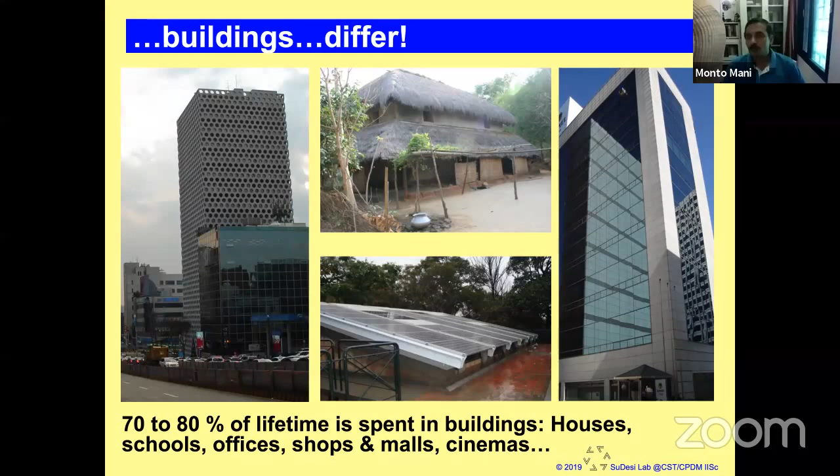Today there is a complete new concept of wellness, where people are looking at holistic living, mental health, physical health. So the metrics of satisfaction with life was: am I happy? Do I have time with my family, time with my friends? Those sort of things, rather than what is my income level, my take home salary, do I have insurance, what is the GDP. Those were the initial performances of prosperity. Today they are looking at a different measure for it.

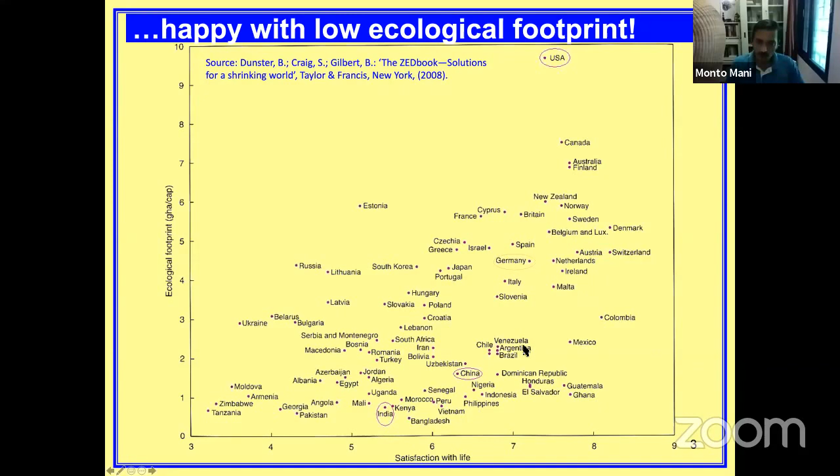And with this whole COVID situation where we were forced to stay at home, forced to put up with a lot of activities happening parallelly, managing school, managing office, managing the home front, it has also brought forth the fact that we need very little. Earlier we were wanting to travel every time, didn't have time to go to office, the traffic. What this corona has also taught us is how much little we actually need to survive.

So if we relook at reopening the economy and going forward, it has already taught us a few lessons in terms of, do I continue the way I was continuing before, or can there be some improvements I can take from? Definitely it has caused a lot of grievances, a lot of deaths, no doubt about it. But at the other end, if you look at what opportunity it has given us, it has given us an opportunity to stop and think as to whether I should continue the way I was doing before the whole COVID situation started.

And this is happening across the world. Construction industry is looking at green approaches now. Industries are looking at greener manufacturing options, looking at net zero energy, things like that, which didn't happen before.

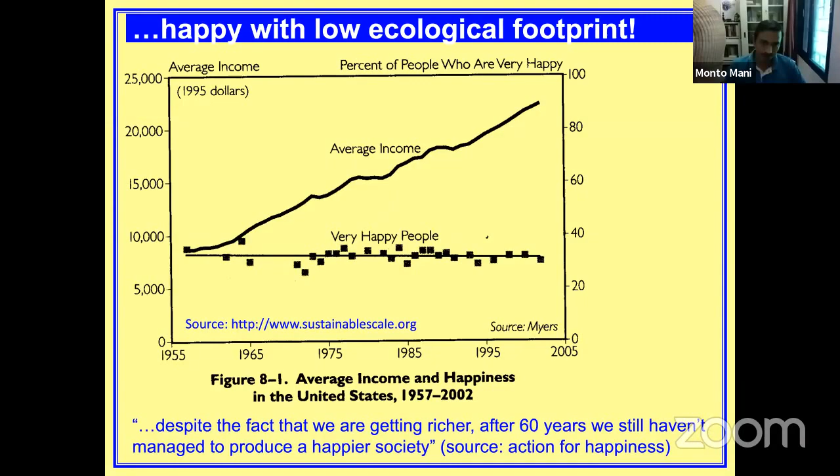Not requiring electricity at all and generating as much electricity as you consume are both not the same. I'm not saying that the people on the left don't use energy - they use firewood. If you compare the health levels of those people versus people in the city, people in villages are always healthier. There is always this concept of development, impoverishment, deprivement, drudgery which we associate with the village. Unfortunately, today that is taking a very different perspective.

I'll give you an example. I go to a village market every week, until this corona issue started, where I used to find ladies lift heavy bags of vegetables. If you see the way they lift the vegetables, it looks like they're doing a gym workout. Now the problem is that any engineer who sees it will say, oh, that is drudgery, ladies are not supposed to lift that much.

If you go to a village farm, you will see villagers doing hard work through the day, and we say, oh, that is drudgery, we need to give engineering solutions to that. We provide engineering solutions, and then people take to a very convenient, comfortable life, because of which obesity starts to set in.

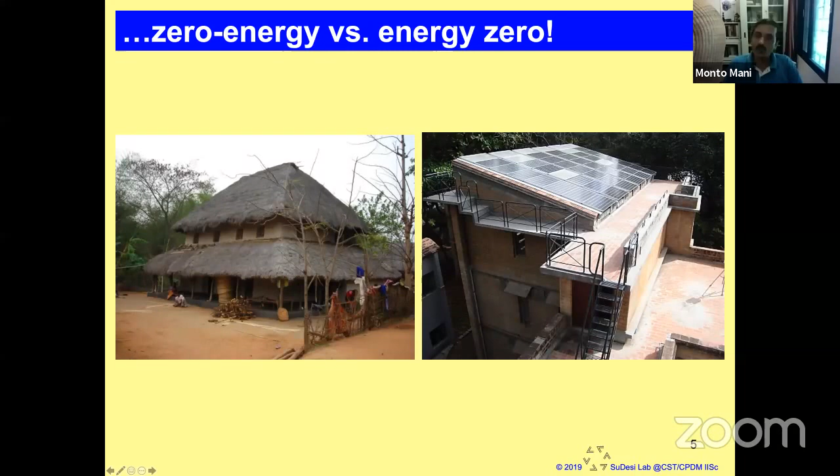Operational energy is the energy required to keep the building comfortable. For example, if you have a house which is very poorly lit, you need electricity to drive some bulbs because you need to work in that room.

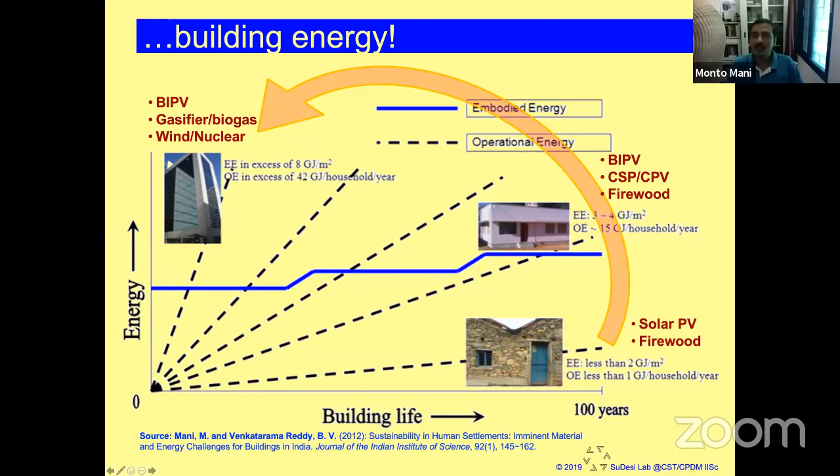So you will see the nature of energy densities that are required. And for example, large power plants covering desert areas. Today, large power plants, large photovoltaic systems are covering agricultural lands to provide for city-based energy consumption. The challenge we have here now is that villages are also changing. At one side, it is good, where we say that modernization should happen. They also have a right to access modern life.

On the flip side, we are losing the skills associated with these materials. We are losing the technical know-how with these materials. And I will also tell you why that is important. And what is happening is that their energy dependence also increases because the way the houses are changing, first the roof changes, then the wall changes, then the entire house changes. The houses become more uncomfortable, which means they need fans, they need air conditioners after that. An air conditioner then becomes a lifestyle requirement.

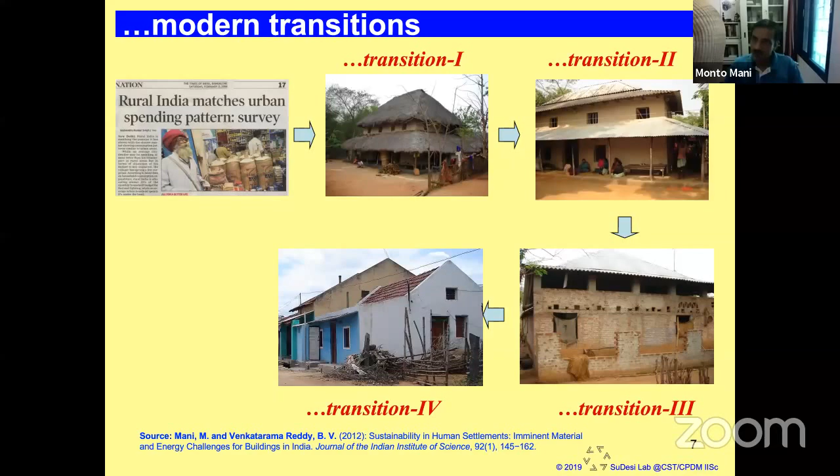Now, this transition is happening in China as well. Now, the world is worried about India and China, worried in both senses. One is an opportunity, the other is a threat. The opportunity is that 1.8 billion people, say about 0.6, 0.7 billion in India and 1 billion, 1.2 billion in China, are rural population. And if these rural populations are going to improve their lifestyle, adopt a modern life, it is very good for the economy. Economy will grow.

Right? The threat side is if they start adopting 40 times, 50 times the resources that they were originally consuming, do we have the capacity to provide for those resources? What about the emissions associated with those changes? We are already having threats of climate change. And if that is going to increase by 40 times, then how do we address this situation? So the challenge becomes how do we regulate their aspirations, provide for their aspirations, while trying to keep the resource dependence, the ecological footprint, and the emissions lower.

These are the estimates that we had made in 2012. And what we found is that if the houses were just changing material without the form changing, there is 6 tons of carbon dioxide emissions per house, right? And if you then project it further, we will find that this embodied energy alone can moderate about 10 to 15% of the 2030 projection for GHG emissions, right?

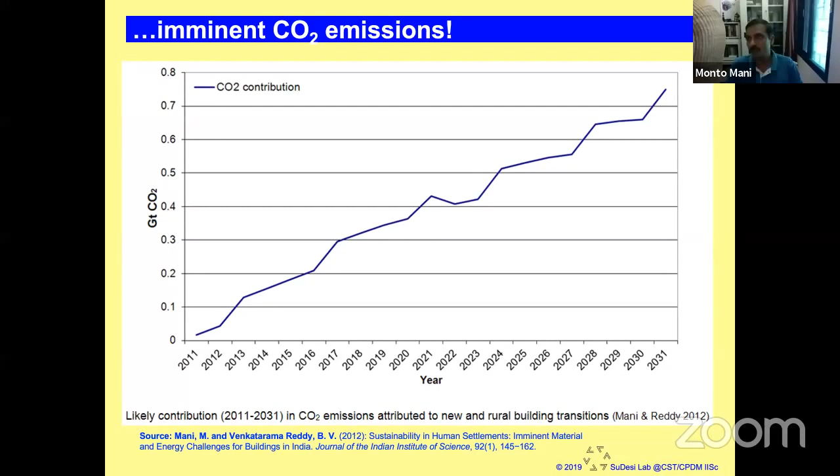And if you also look at the operational energy, I've looked at the very basic operational energy. These were based on our own studies in villages, matched with the government reports on purchasing power, appliances, appliance efficiencies, adoption of energy efficient measures, and all of that. What we find is that this projection is not yet accounting for embodied energy, the rebound effect.

What the rebound effect states is that when appliances become more and more efficient, they become more affordable and people start to own more of those appliances. So the net result is because of using energy efficient devices, our net energy consumption actually goes up. It doesn't go down. And that is a serious problem because even if you today go to Google and type rebound effect, you will find that places like Germany are having problems of 200%, 300% rebound effect, right?

And the thing is, take our own lifestyle. What I was consuming 10 years back, my own energy, and what I'm consuming now, I'm consuming more now than I was consuming 10 years back. The computer that I'm using is more efficient than the computer I was using 10 years back, right?

And this also is visible in villages, where at one time there was just one television to a village showing Doordarshan, and Doordarshan would operate from 7 in the morning till about 9 o'clock and about 7 in the evening to about 9 o'clock. And the village used to get together to see one movie or maybe a cricket match, discuss, so the social unity was much better. And with that, they would switch it off.

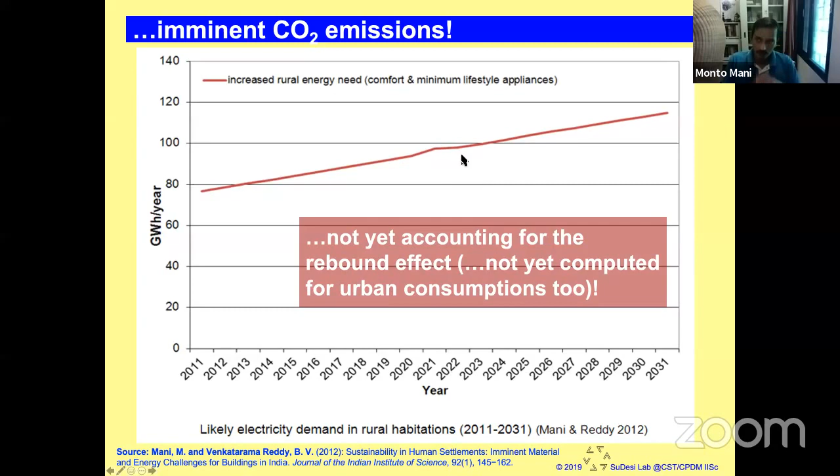This was a study that I was telling you about vernacular dwellings. Our students actually presented this last year at the conference in Heriot-Watt University in Dubai, where it was a conference on comfort at the extremes, looking at how climate change is going to impact dwellings. And what we did is that we took a few dwellings in rural Bangalore and studied if their temperatures and humidity conditions were going to change.

Say if they were moving from warm, humid as they are today to temperate zone, and what if they move towards hot, dry zone, right? And we looked at both traditional dwellings and conventional dwellings. Conventional dwellings are what you see in the city.

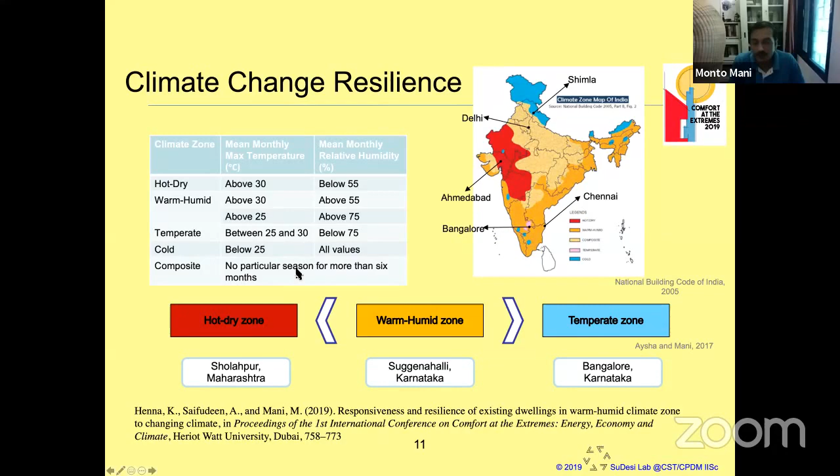And what we found is that as of now, conventional dwellings require fans because their natural ability to provide comfort is less, whereas vernacular dwellings more or less lie within the 80% band, right? Which means that the dependence on electricity, like fans and coolers, is much lower. Then if they get warmer, hot, dry, you see how badly the conventional dwellings are going to respond as against vernacular dwellings. And if it goes to temperate, you will see that the vernacular dwellings perform very well.

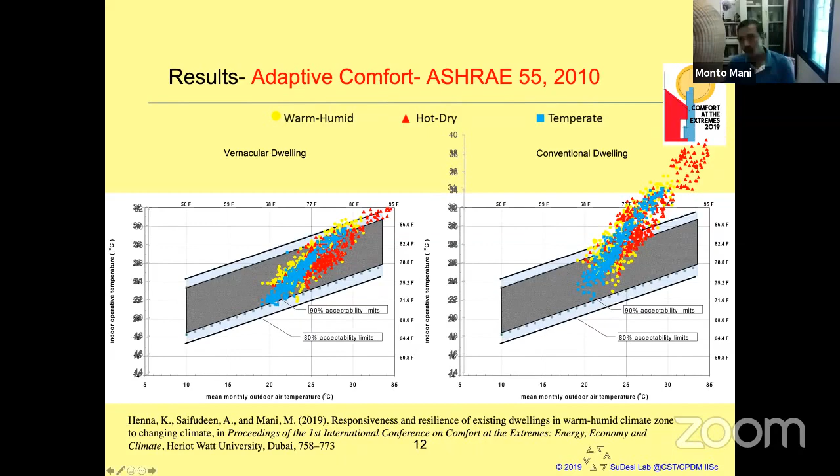Then coming to photovoltaics. See, everyone says photovoltaics is green. But if you look at the reports since last month, the government is now coming up with a contingency plan for what to do with discarded, waste photovoltaic panels. And we are talking of a few 100,000 tons of photovoltaic waste coming out every year, starting from 2030. Because though photovoltaic manufacturers claim a life of 20 to 25 years, they are decommissioned in 10 years, 12 years because they are economically unviable.

Degradation rates are much higher. And maintaining them becomes a problem. So what do we do with these panels, right? So that is a serious issue. And you can't take them to the dump site. You can't easily extract the silicon and recover resources, because those technologies are still very, very uneconomical at commercial scale, right?

Germany is doing some work. At IIT Bombay, there is a group doing some work. All over, there are some research activities happening in this area. But we have not thought about what happens to these panels at end of life, right? Even in the operation of these panels, it is very challenging.

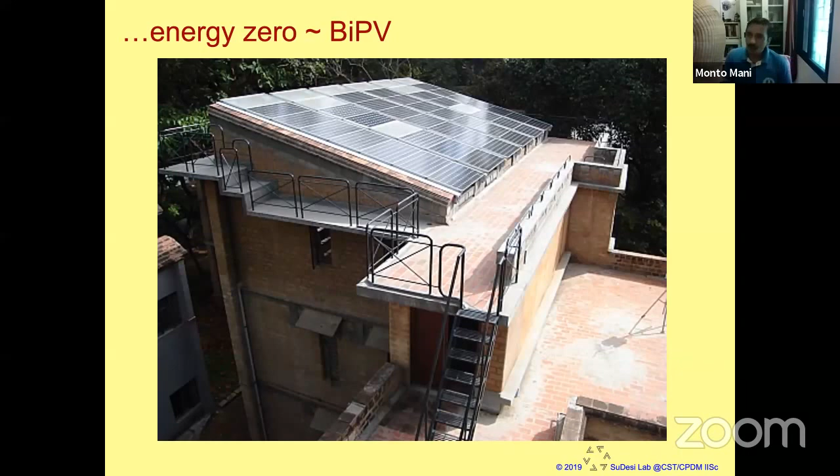So this was some work that we published way back in 2010, and it is actually the single most cited paper in the area of dust impact on photovoltaics, right? And in fact, the paper subsequently went into supporting a lot of projects across the world, including what we have in this Indo-US consortia here. And what we did here was to understand the various mechanisms that influence soiling. And soiling has a very detrimental effect on the performance of the PV panel.

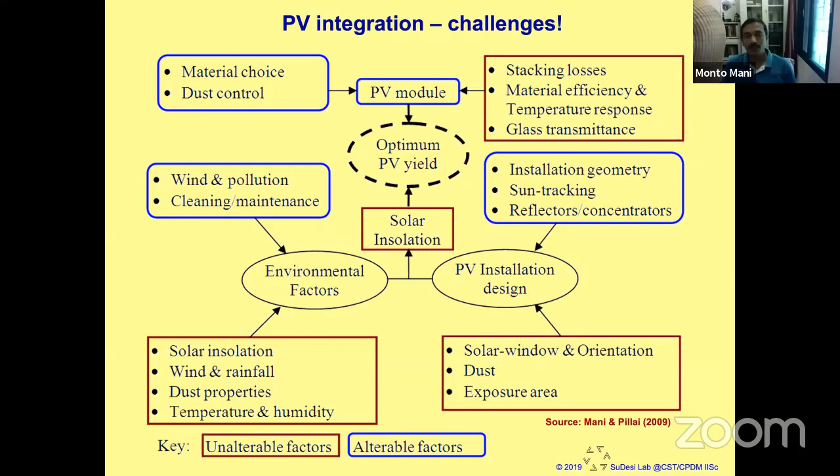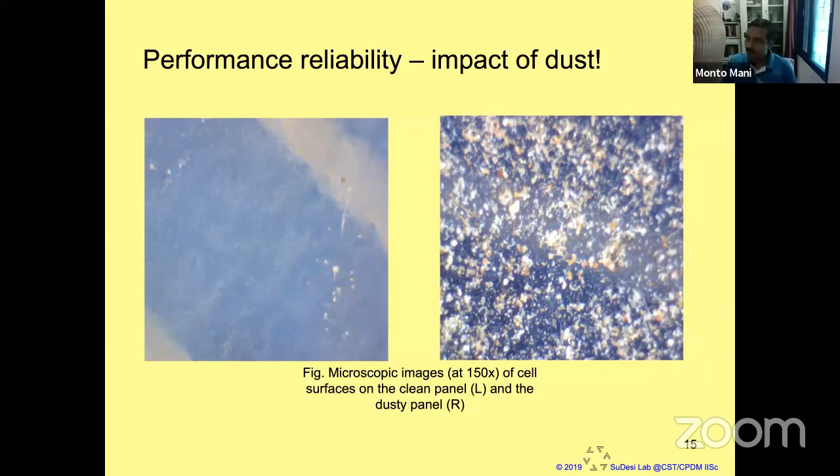And people are not aware that it takes about half a liter of clean water per meter square per day to keep the panels clean, right? So you can imagine for a megawatt scale level where there are a few tens of acres of land utilized, half a liter of clean water per meter square per day is a lot, because there is scarcity of drinking water, right?

And I know there is a power plant in Sri City which is buying mineral water to clean the panels, simply because the groundwater salinity is very high and that causes stains. We cannot use seawater to clean the panels. So what we did is that we tried to look at mechanisms to reduce the water requirement to clean these panels, and brought it down from 500 ml to 50 ml. And then we looked at other phenomena happening at the surface between the solar radiation and the panel when there's a dust layer in between.

And here we used simple brooms, palm leaf brooms, which are used in villages. And we found that palm leaf brooms are extremely effective in taking up dust without the need for water. And they are also very easy to maintain, because we put the edge of the palm leaf under the scanning electron microscope, and we found that the tips are like that of a shark's teeth. With every layer breaking off, there are more sharp edges coming out, which means that the brooms are able to retain their cleaning efficiency as you use them.

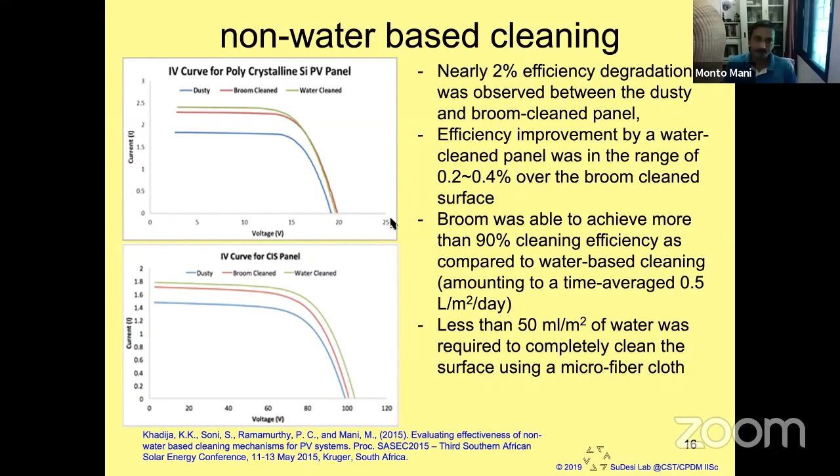I will also come to another aspect, smart buildings. There is a lot of work across the world saying smart buildings will reduce energy, will make places more comfortable and all that. Now corona has pulled the gas out of that belief. Today, the ASHRAE standards, the American Society for Refrigeration and Air Conditioning, are clearly stating we need to bring fresh air inside the buildings, even in an air-conditioned building, simply because air conditioners tend to recirculate air within the building, which is bad from a COVID point of view.

So the entire air conditioning code needs to change, right? People are now looking at opening windows, allowing fresh air inside, because air conditioners will spread the disease, right? People are looking at sitting more spaced apart, whereby the air conditioning load will be higher, because instead of a room occupying 20 people, there are only 5 people sitting in that room, right? So this whole concept of smartness has been punctured, right? And I will tell you another example.

This is some work that we started about 3 years back: where do we put energy sensors, or energy neutrality sensors? Now, what I mean by energy neutrality is, if you take a small sensor, say a motion sensor, which detects activity within a space and switches on a light, where does it make sense to put them, and where does it not make sense?

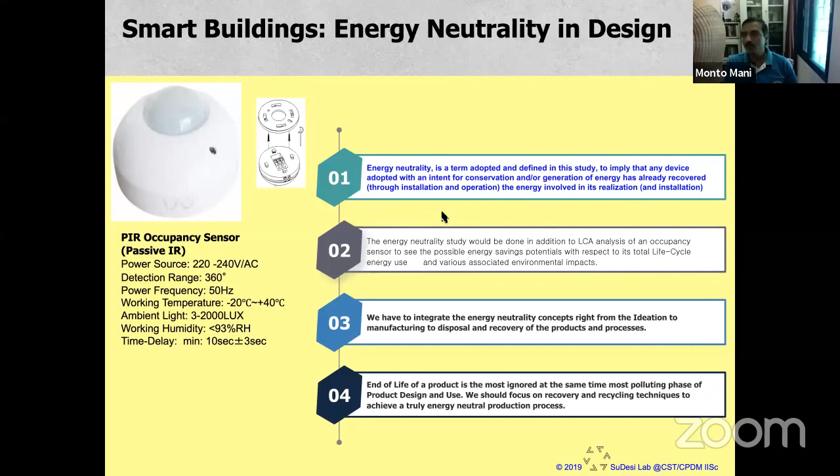So this is what I said. We looked at all the data very minutely and said what happens if a sensor is manufactured in Shanghai, brought and installed in a building in Bangalore. And we came up with this measure of gram per wattage ratio. The gram per wattage ratio is the grams of the sensor, the smart network, connected to the wattage of the load.

And we took a few examples of, say, a filament-based bulb and the energy payback period as against an LED bulb. Now, the problem is that with LED bulbs, the energy payback period is much higher because the bulbs are already very efficient, right? If a device is inefficient, then the scope to save energy is much higher. So it might be possible that you put an LED lamp in a room and switch it off and on whenever you feel you need it without connecting it to a sensor, because connecting a sensor will completely change the energy dynamics if you look at the building scale.

And in fact, the student who's working on it also went to the University of Florida to do work on this. And we are now trying to come up with recommendations for smart buildings to say that putting sensors for these appliances makes sense, and putting sensors for these appliances does not make sense, right?

There is also another problem. We looked at behavioral changes. What we meant by behavioral changes is we installed this in the office, where as soon as we enter the office, the light goes on, and when I leave the office, the light goes off. Now, at the subconscious level, I start getting trained to think that I just have to enter a room and the light goes on, and I just have to leave the room and the light goes off. I'm behaving the same way at home, right?

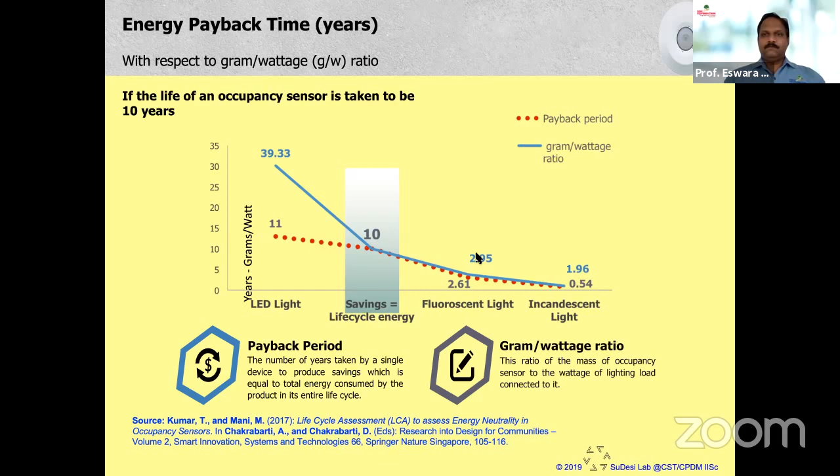So these are some measures, like I was saying, that if the sensor were made in India as against China, the entire life cycle energy matrix changes, right? And this also comes back to, from a sustainability point of view, why should we consume local resources? Why should we consume local skills? Why should we depend on materials that come from far away, right?

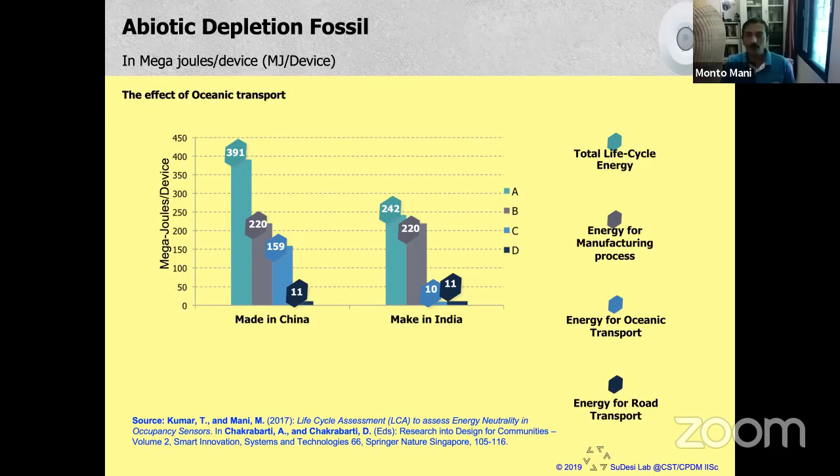Finally, I will also take you to the concept of safe lighting. Today, LED lights are a source of a lot of problems. In fact, even our mobile phones have something called night mode, because excessive use of LED lights is causing a hormonal imbalance in us, which prevents us from sleeping at night.

And this happened on campus, where I was chairing a committee looking at installing LED lamps. The moment we started installing them, we started getting reports of students complaining of eye stress and eye pain. A lot of nocturnal wildlife disturbances were also reported. And not only that, we changed the lights in our laboratories to LEDs, and students were complaining of eye pain.

And when we measured various light sources under a spectrophotometer, we found that the yellow light that you see here is the natural spectra that comes inside.

This is the wavelength on the x-axis. The incandescent bulb, the filament-based bulb, which we say is the most inefficient, is the closest as far as natural light is concerned, right? When we look at LED light, there is this blue peak, which is much higher than what our eyes are normally able to withstand. And if you look at medical journals, if you look at a lot of reports from the American Medical Association, they are already banning white lights.

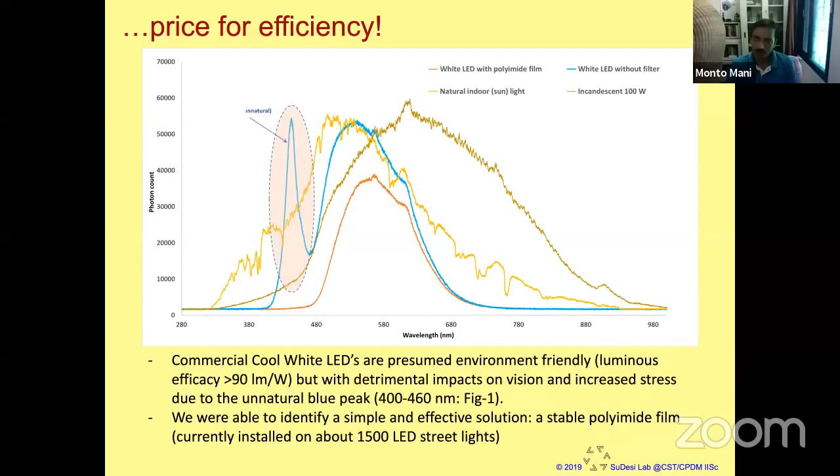So finally, we identified a filter. The filter is called Kapton, Kapton. It is commercially available on Amazon. It's a simple polyimide film. And the advantage of that polyimide film is it can withstand the temperature coming from the LED lamp. So we made this information available to the public in this article that came out in Down to Earth, where you can actually put these Kapton tapes on LEDs to make them safe.

Now, that filter is able to take off the blue light. As far as safety of the eyesight is concerned, it has definitely helped. But in terms of color rendering, representing the colors as they are under those lights, there are some limitations. But across the entire IISc, we have put these tapes on almost 1,500 to 2,000 lamps across campus. A lot of industry have approached us to find out how we do this, how do we adopt these filters and all of that. But we made it freely available to the public.

In fact, I have received so many emails. There was one email that I received from a lady who says that the husband changed the lights in the house to LED, and they had a light bluish color on the wall. And from the time they are in that house, they're having issues of eye inflammation. And the husband is most of the time away from the house because of going to the job and coming back. So the time at home is very less as compared to the lady in the house. And then I shared this article with her, and I told her that, see, there are problems with LED lamps.

And today industry is coming up with what is called a warm white LED or a neutral white LED, which we have tested. Even warm light has a little bit of blue light, but it is much lower than the cool white light that is otherwise adopted by industry. And to us, it feels very good, because as soon as we stare at it, our body generates hormones which make us feel alert. And when we feel alert, we feel good, right? And that is why it causes a very momentary feeling of goodness, which actually in the long term is bad.

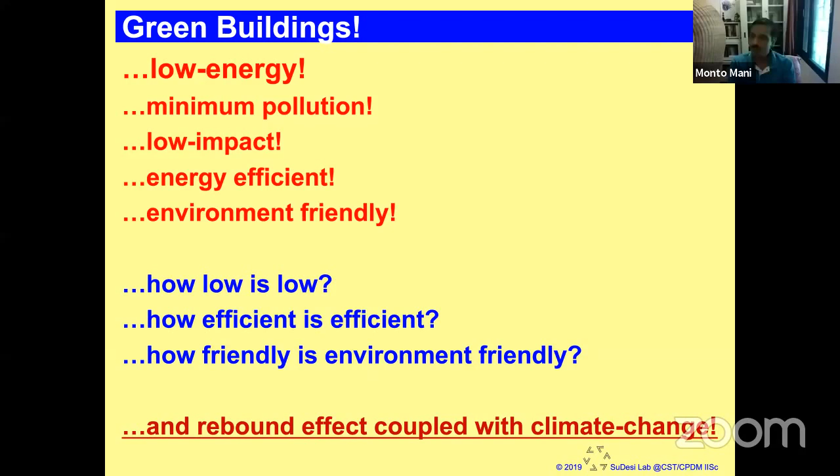So I will stop with that. If there are any questions, I'll be happy to take.